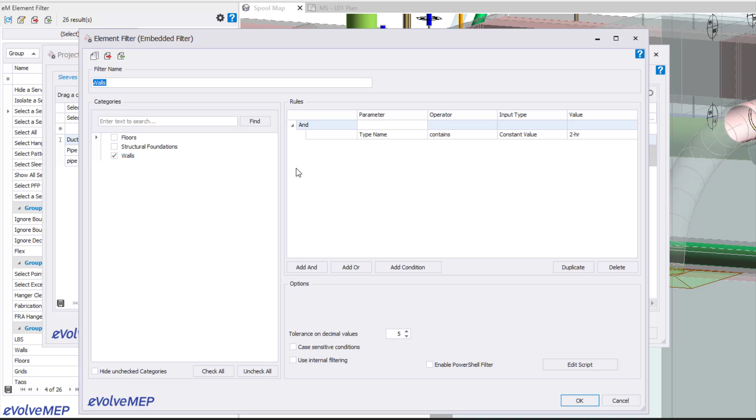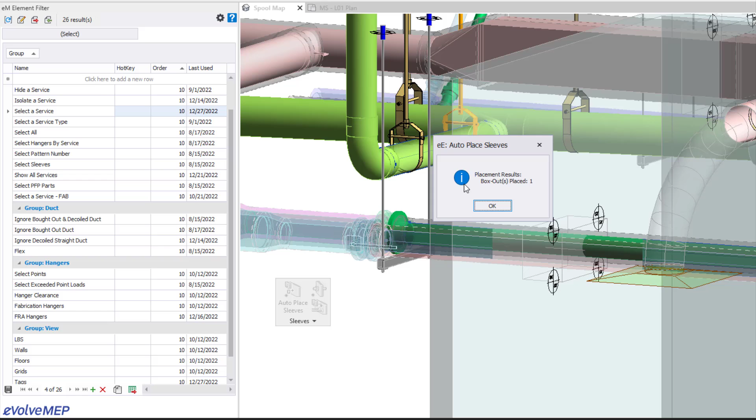Auto place sleeve is super helpful. You can just select a whole bunch of your elements within your floor or your area, however you want to do it, or you can kind of just limit it as well. Select what you need, press finish, and then you'll have a pop-up here indicating how many box outs or sleeves were placed. So in this situation, one box out was placed. One thing I love about our box outs as well is the fact that they have pre-embedded points, and those pre-embedded points will be within the sleeves as well.

Moving along, we have our Smart Bend Multi-Trim. I love this feature. It's going to be within Evolve Electrical. There's a lot of use cases for this feature itself. You can hold down Shift and it will replace native Revit bends with Evolve Smart Bends, which is super helpful if you're going to be utilizing Evolve mid-project. Or the other option is it will allow you to connect one or more conduit runs together with Evolve Electrical offsets or Kick 90 Smart Bends.

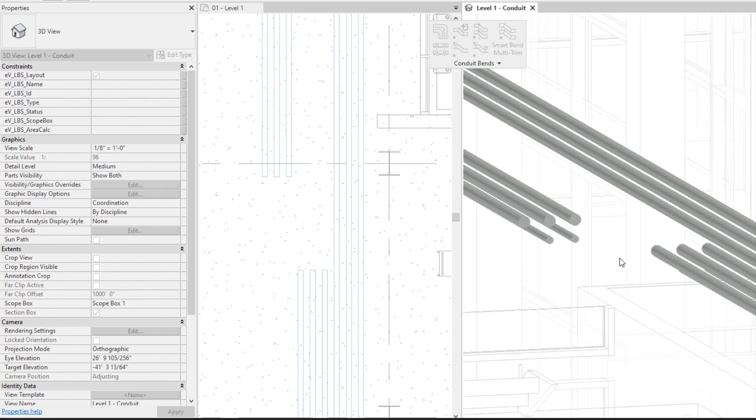So let's do that option. So I can select on my feature, select this grouping here, press finish, select my next grouping of conduit here, press finish, and there you go. Now we have a bunch of our Evolve offsets placed.

Next, let's talk about my favorite quick tool for Evolve Mechanical. So quick tools are going to be within both Evolve Electrical and Evolve Mechanical, and the tool that I'm going to talk about right now is going to be also within both Evolve Electrical and Mechanical. So I'm going to be talking about our MEP rotate. So we have our set angle. So when it comes to setting the angle, you can choose from the drop down here, or you can also just write in the angle that you want to be adjusted there.

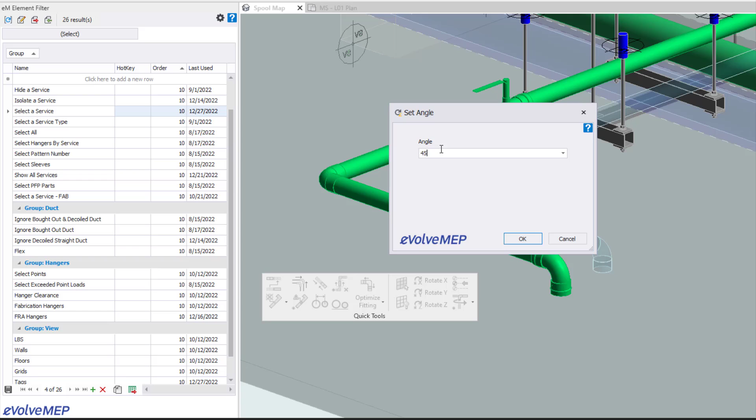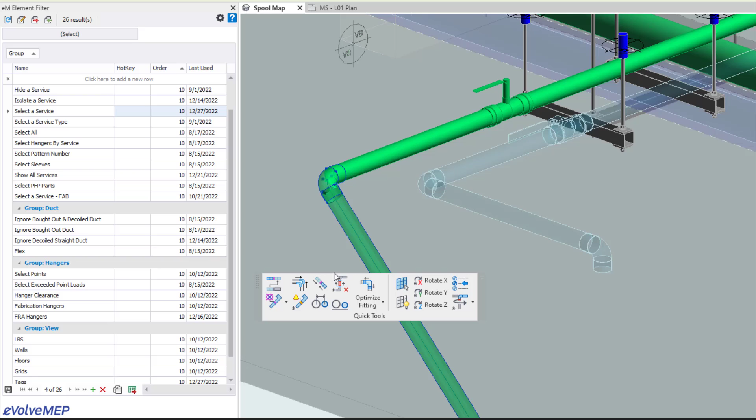So with our MEP rotate, it's a really nice and easy feature to do, but why I love this so much is looking at this run right here, I can rotate it at this point, but I can't rotate my run at this point. So with my MEP rotate, I can select my feature, select my elements, and I can hit finish. Now that will rotate it at that point. I can also keep hitting enter as well to keep on rotating my element at that point.

Let's talk through some supports within Evolve Mechanical. I like that we have two different options of placing hangers. We have our ITM hanger feature and we have our hanger placement feature. Our hanger placement feature allows you the option of using ITMs or families.

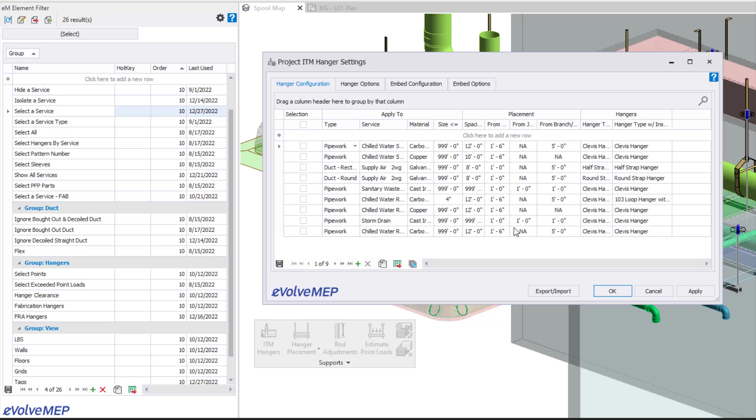Within both features, you have a lot of control of the settings themselves. So looking at the ITM hanger settings, you can adjust your type, your placement, and the hangers. One thing I like about the hangers as well is the fact that you can specify a different hanger type if those parts and pieces have insulation. You can adjust your embed configuration, specify deck type, and also we do have that collision detection as well.

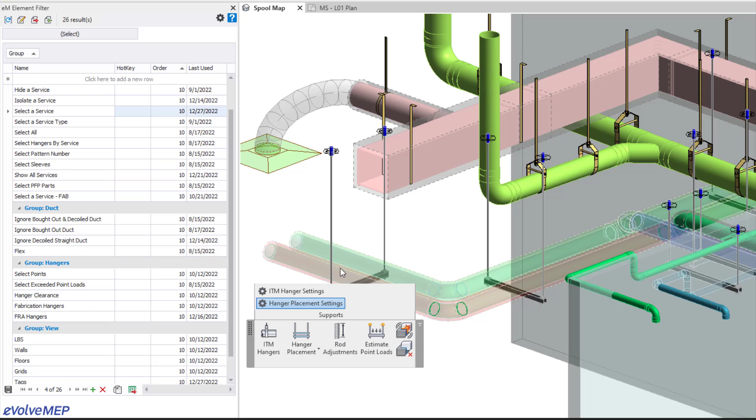On the family side, this feature right here for the hanger placement is going to be what you're used to if you've also used Evolve Electrical. So let's go into our hanger placement settings. So on our Evolve Mechanical side, you can specify if you want fabrication or family, and then you can specify your common settings. On the ITM side, you can specify that fabrication settings and that collision detection.

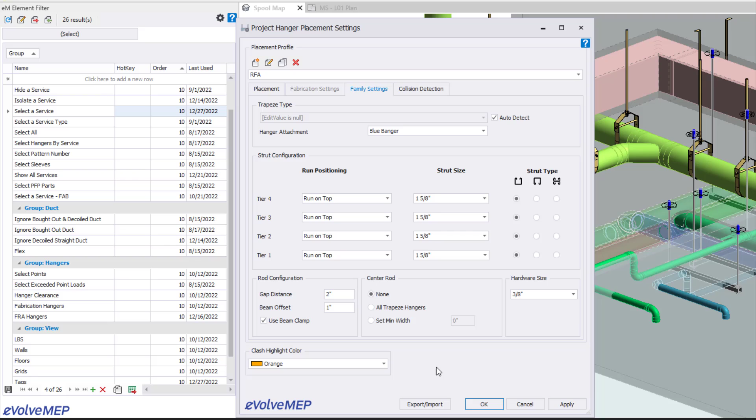On the RFA side, you can specify a good amount of settings for your families. These family settings are also what you're going to be seeing on the Evolve Electrical side when placing your hangers as well. Same with that collision detection.

All right, the last feature I'm going to talk about, just because of time and I don't want this video to be 10 minutes long, is our report manager. Hands down, this is probably one of my favorite features. The possibilities are endless, which is amazing to see. But first, I'm going to come in here and place in my hangers, so you can see how our hanger placement works on the electrical side and how similar they are.

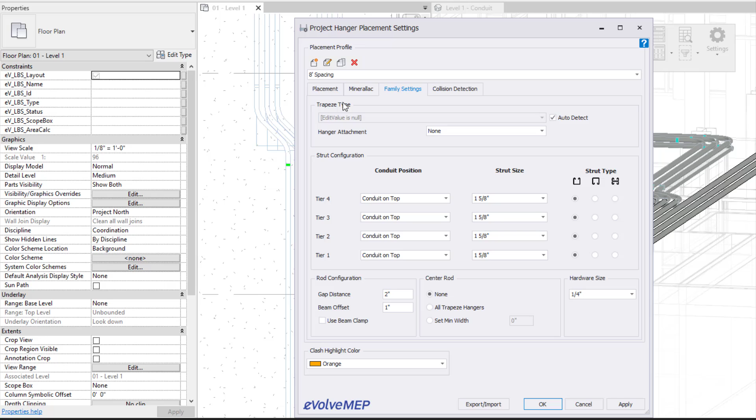So here is our hanger placement settings. So again, 8' spacing, the common settings. The family settings here, again, they're going to be very similar to what you just saw on the mechanical side. On the electrical side, we can specify if you want Minerallac hangers, so any minis for your single conduit. And we again have that collision detection.

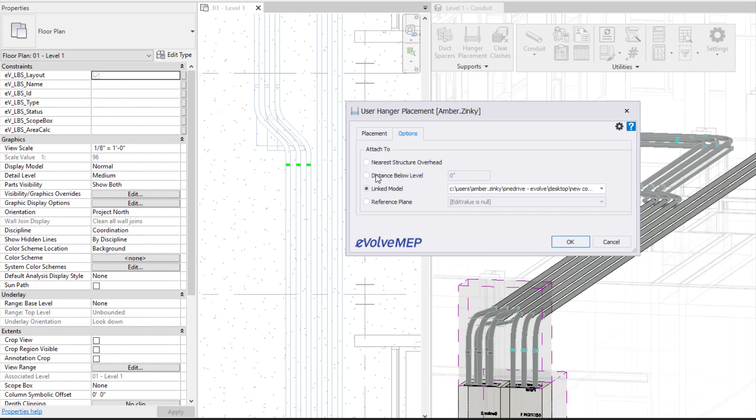To run the feature, I'm going to choose my profile, my mode, which will be the entire path, and my attached to, I'm going to do a linked model. I'm going to select my starting points. So I'm going to select my run here, press finish, and I'm going to choose the direction. I want my hangers to be placed down my entire run.

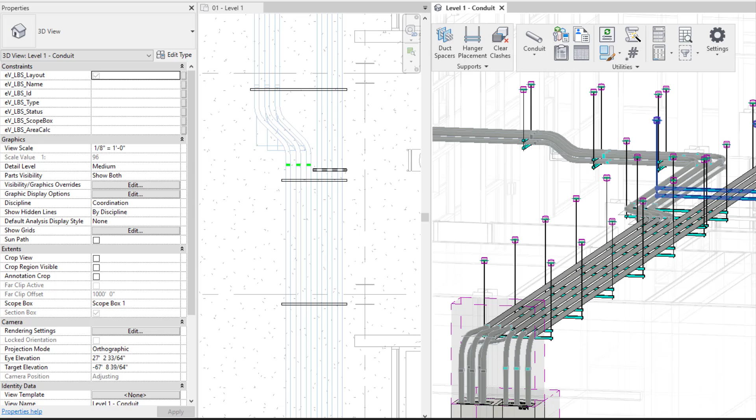So there you go. Now you can see how our hangers are placed. You can see for elevation change, it went from a 2-tier to a single tier. So really helpful to have that be placed. So now let's go over our report manager. So within our report manager, we have a lot of pre-set up reports that you can easily import in from your sample files.

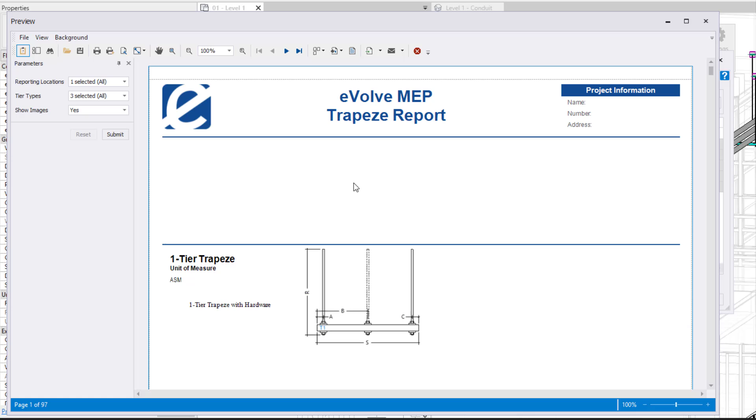So I'm going to do my trapeze report. So I'm going to select on my report here, and I'm going to run my report. You can see this report is amazing and it has a ton of information. So elevation, offset, your strut type, your rod lengths, and support types as well. So a lot of really great information.

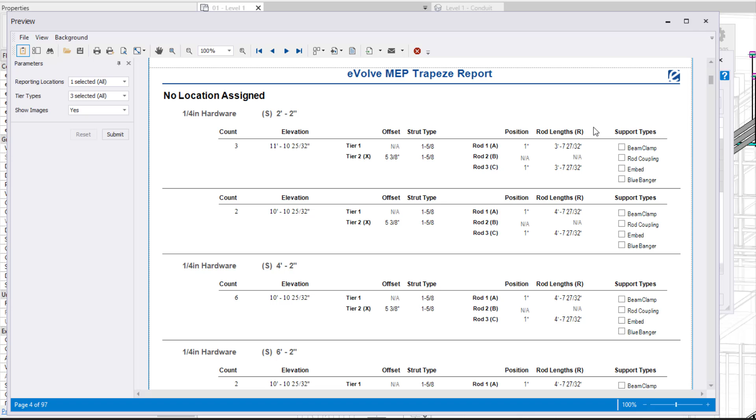This is great for, in addition to your spool drawings or your location drawings, you can also provide this report on top of that. So not only do we have our trapeze report, we also have a bill of material, and we again have a ton of different reports that you can easily import in from that sample file as well. So here is your master bill of material.

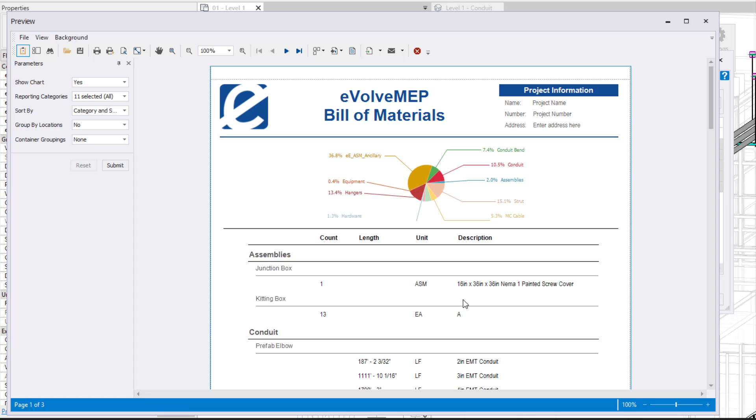Obviously, you can modify your logo and what is said, and you can make some minor tweaks as well, or you can also create custom reports if you would like. So on the report side, there is a lot of really cool things that you can do, and the options are endless, like I said earlier. So that is 12 days of Evolve.